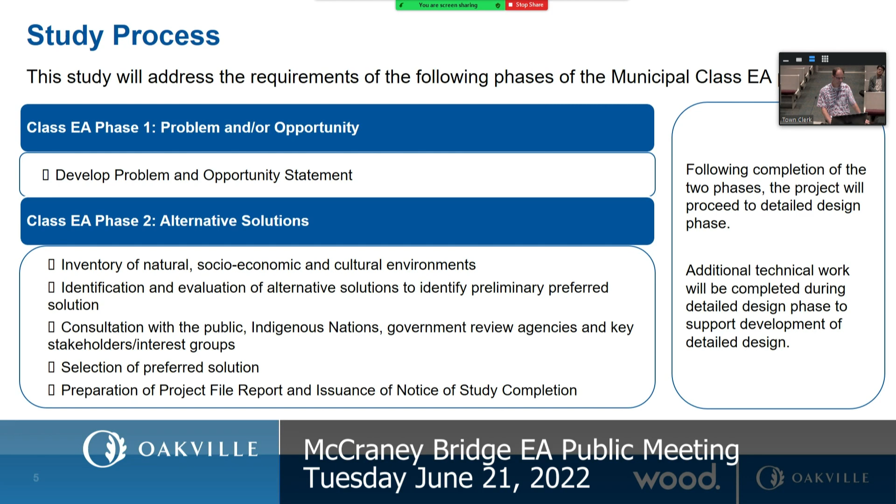So work completed to date for the McCraney Creek Bridge replacement under the Class EA for Lakeshore Road includes natural environmental assessments, fluvial geomorphology and channel design, Stage 1 archaeological assessment, cultural heritage report, and stormwater management. In addition, there was public consultation that was held, so there were 3 PICs, stakeholder meetings, and on-site resident meetings.

So all of these, of course, were completed for the broader study, the broader Lakeshore study. However, they did include components for the McCraney Creek structure. Similarly, for agency consultation, meetings were held with Conservation Halton in 2017 and 2018. These also included a review of alternatives for McCraney Creek. And we consulted with Indigenous nations. So we circulated notifications. We met with the Mississaugas of the Credit First Nation.

There are additional technical investigations that were completed, notably the flood mitigation opportunities study for 14 Mile Creek and McCraney Creek systems, Town of Oakville's creek inventory and assessment studies, and structure inspection, which was done independently of this study as recently as 2021.

So a little bit more information here. On the top right, you can see the key plan, which locates the McCraney Creek Bridge on Lakeshore Road, just east of 4th Line and west of Whittington Place. The bridge structure carries McCraney Creek, which flows into Lake Ontario, south from Lakeshore Road West. It accommodates 2 lanes of traffic, obviously eastbound and westbound.

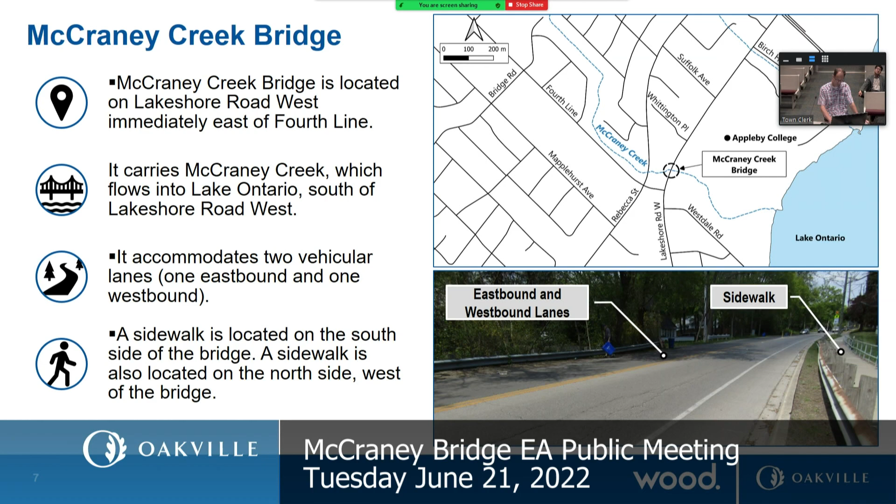So with respect to the McCraney Creek Bridge structure itself, it's a concrete arch structure built over 80 years ago in 1940. It was subsequently extended with a box culvert section. So you see the original arch on the left, the box culvert extension on the right. Width of the culvert structure is 5.4 meters. So those 2 photographs just show the conditions on the north side and the south side.

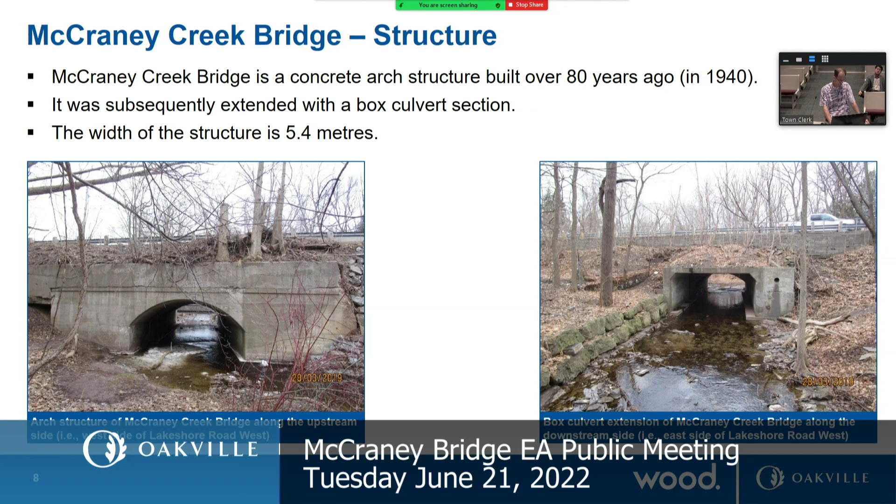Okay, so there was emergency repair works completed as well in 2017. In 2017, the northwest supporting wall of the bridge collapsed as a result of severe erosion, an ongoing problem. So emergency repair works were completed to temporarily stabilize the slope. The collapsed wing wall, along with armor stone, were used as temporary support for the slope. So some figures there show both the pre-existing conditions with the failure as well as some of the emergency repairs that were completed.

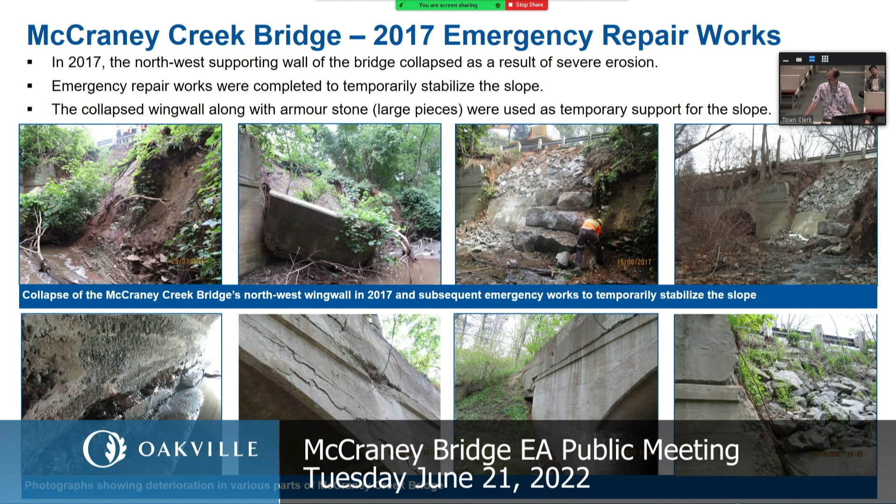So with that, I'd like to hand it over to Mir Telpur to take the next 10 slides or so, and then I'll come back to wrap it up. Thanks, David.

Good evening, everyone. I will now be going through two sections of this presentation. One section being looking at the existing conditions at the site of this McCraney Creek Bridge, and I'll also be going over the alternative solutions that we have identified and evaluated.

When the creek originates in its headwaters, it takes a form of natural channels and swales, but when it works its way downstream, it goes through urban areas where there is severe alteration to the creek, and it gets contributions from stormwater sewers.

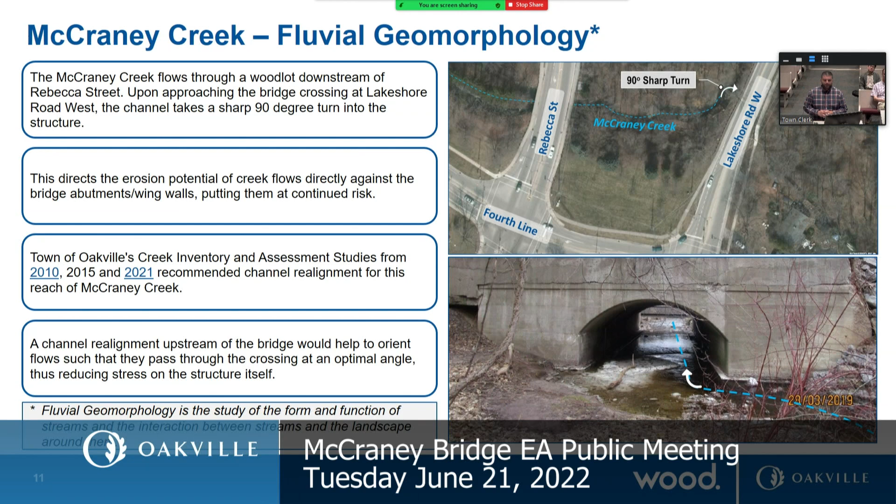So there are certain enhancement opportunities there in order to improve both the fish passage as well as the fish habitat. That would include naturalizing the creek bed under the crossing to improve the fish passage, incorporating natural channel design to improve bank stability and create flow morphology and diversity, incorporating vegetation into the channel edges and banks, and also enhancing the riparian vegetation. So the creek realignment is not only beneficial from a geomorphological perspective, but it's also connected with fish and fish habitat, and it also helps enhance that environment.

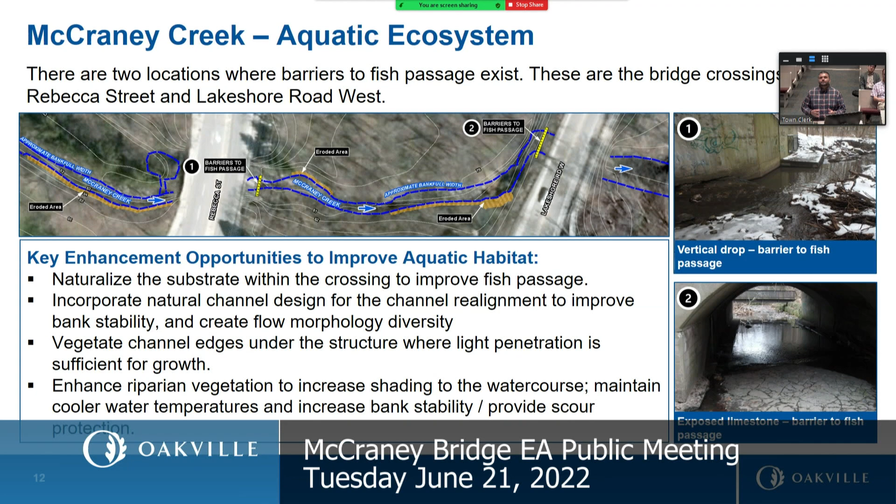So now we will look at the terrestrial ecosystem. Terrestrial means anything land related. McCraney Creek, downstream of Rebecca Street, flows through a woodlot, and that woodlot is primarily dominated by invasive Norway maple, with some native species such as black walnut and willow species. Our investigations also identified that the vegetation and the trees are disturbed, and there are signs of flooding causing erosion to the roots of the trees and vegetation.

Our investigations also identified that there are some trees in this woodlot that may provide suitable maternity roost sites for some of the species at risk bats. There are some opportunities to enhance the terrestrial environment, for example, planting native vegetation as well as native trees to improve the terrestrial habitat in this area.

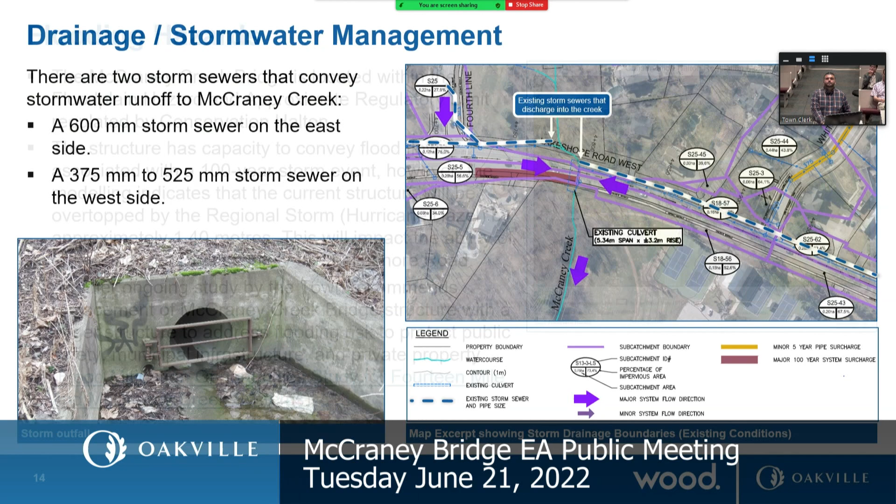The photograph on the bottom left of the screen is an example of the storm outfall, located on the west bank of the creek, west of the Lakeshore Road West. In terms of flooding hazards, the McCraney Creek Bridge is located within an area categorized by Conservation Halton as a floodplain hazard and approximate regulatory limit. Those areas are regulated by Conservation Halton.

The modeling completed for this crossing indicates that the crossing can convey flood flows associated with a 100-year storm event. However, if there was an event categorized as a regional storm, or Hurricane Hazel, there would be overtopping across Lakeshore Road of about 1.40 meters. That could impact the ability of emergency vehicles to safely use Lakeshore Road in emergency scenarios.

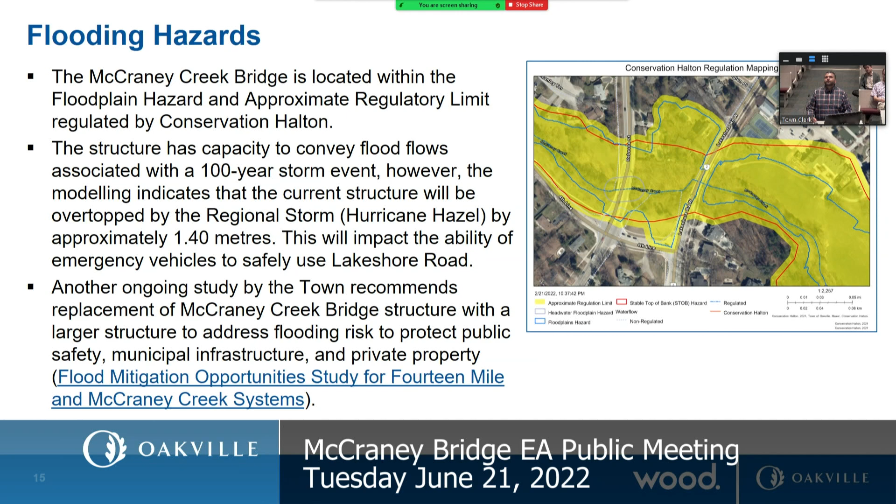The town is undertaking flood mitigation opportunity studies for the 14-mile creek and McCraney Creek systems. That study is recommending a wider structure at this location in order to address the risk of flooding for upstream properties and infrastructure.

In addition, the Town of Oakville, like other municipalities in Ontario, has a heritage register which identifies properties that have cultural heritage value or interest. The register is managed by the town. It includes various properties as well as bridges. McCraney Creek Bridge is not listed as one of those properties, indicating that it does not have potential for cultural heritage value or interest.

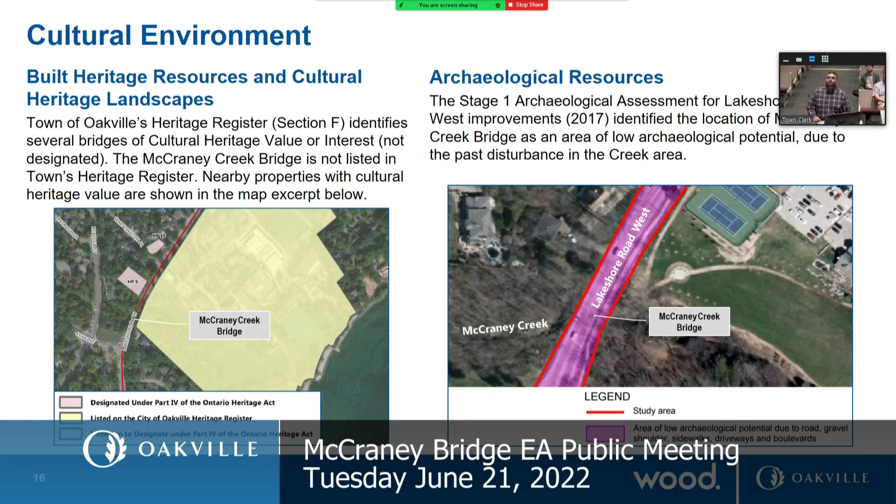In terms of archaeological resources, previous studies indicate that there is low archaeological potential due to past disturbance in this area. So through this information on existing conditions, we have identified the constraints, opportunities, and challenges that exist, and what processes are impacting the bridge.

So we have identified 3 problem areas that we could address with this environmental assessment study. One being the structural deficiency. As we explained with the photographs in previous slides, the structure underwent some emergency repairs back in 2017. Those repairs could be considered a bandage; they are just temporary in nature. A more long-term solution is required for the bridge structure itself.

The second problem area is a continuous erosion hazard on the bridge structure and on the roadway due to the alignment of the creek, which could be addressed via a creek realignment, as recommended through past studies. And the third problem area is flood hazard; as we explained, there is a risk of flooding due to the sizing of the bridge structure, and a wider, larger structure could help address that.

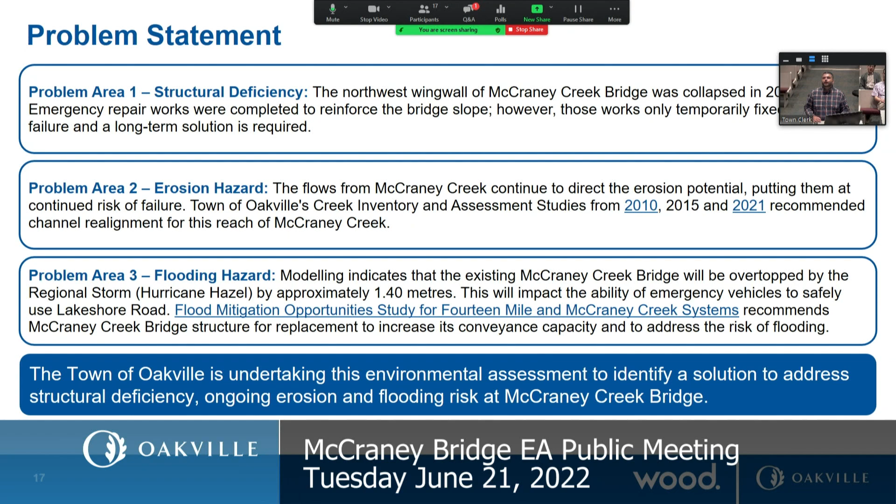So in support of our problem and opportunity statement, the Town of Oakville is undertaking this environmental assessment to identify a solution to address the structural deficiency, ongoing erosion, and flood risk at this bridge location. Now, we thought about how we can address these problem areas. We could leave it as is, do nothing. We could replace the bridge and leave the creek alignment as is.

The third option being we could replace the bridge and also realign the creek. And the fourth option being we could replace the bridge, realign the creek, and also orient the new structure so that it aligns well with the realigned creek. So we took those options and evaluated them. Again, this work was completed as part of the Lakeshore Road study, reviewed and updated as part of the current ongoing study, and shared with Conservation Halton for review and comment.

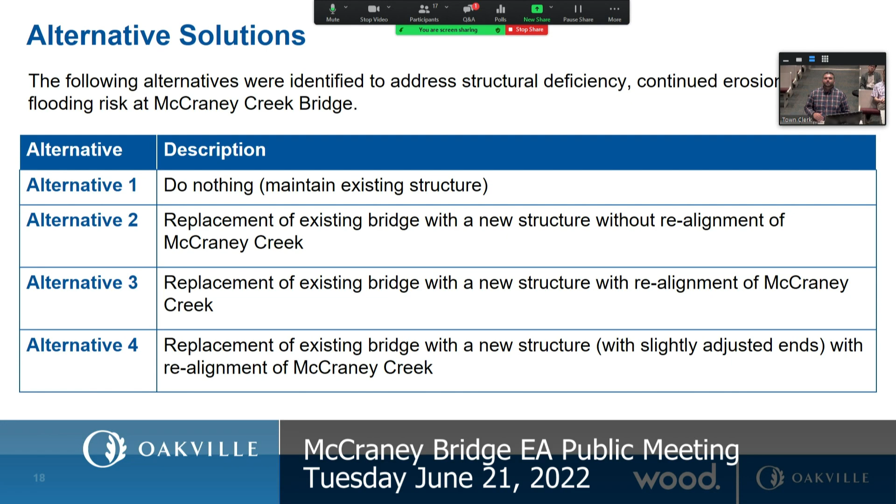If we were to leave the bridge as is, the do nothing scenario, it will continue to pose a flooding risk. The erosion problem will remain unaddressed, and the erosion could significantly damage the bridge structure, which could also pose a risk to public health and safety. The bridge replacement option with no realignment of the creek could address the flooding problem, but it will not address the ongoing erosion risk on the bridge structure and the embankments. So those 2 options got screened out.

We were left with 2 options: bridge replacement with creek realignment, and bridge replacement with creek realignment while slightly adjusting the bridge structure to align well with the creek realignment. Out of those, our evaluation indicated that option 4 is the recommended solution because it will address the erosion issue, it will address the flooding issue, it will align well with the new realigned creek, and it would avoid further erosion risk on this structure.

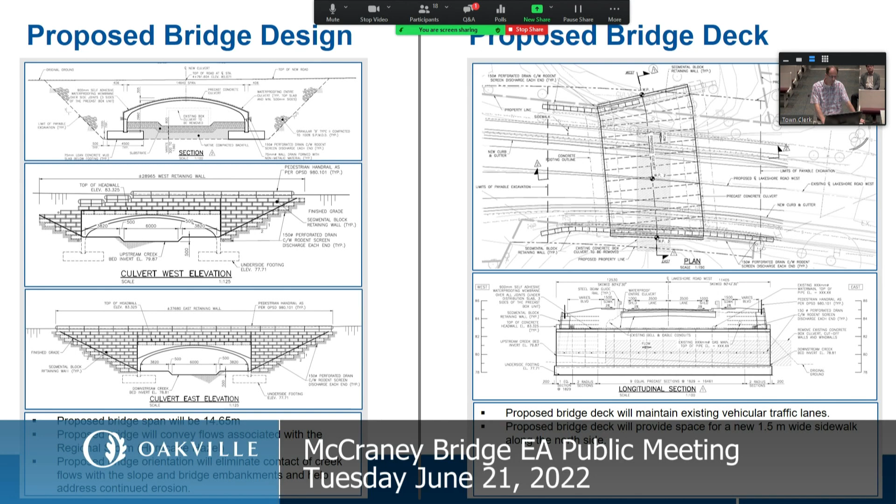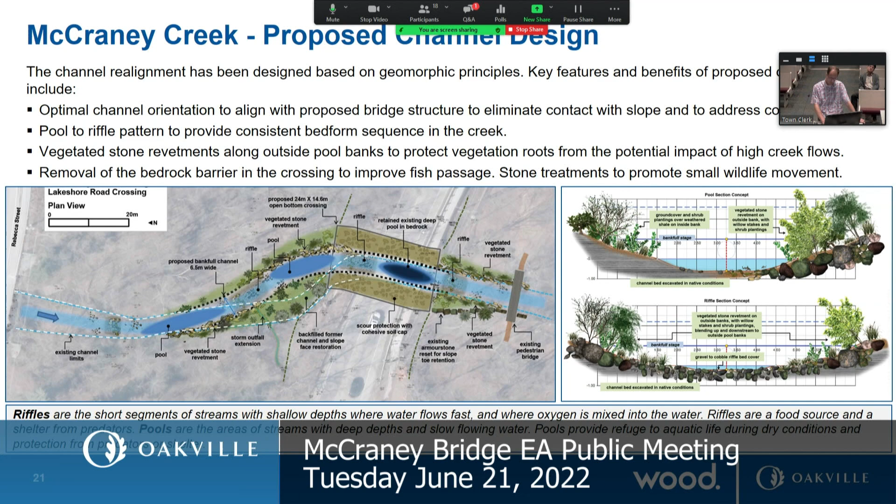A pool to riffle pattern to provide consistent bed form sequence in the creek. Vegetated stone revetments along outside pool banks to protect vegetation roots from potential impacts of high creek flows. Removal of the bedrock barrier in the crossing, which Mir mentioned, to improve fish passage. So stone treatments would promote wildlife movement. You can see from the figure shown here that there's extensive plantings associated with that to stabilize the watercourse over the long term.

So in addition, the project has considered climate change considerations. Oakville's climate change primer provides information to residents on climate change and how to protect human health and natural environment, residential homes and properties against the impacts of changing climate. For building resiliency, the document refers to the town's climate change strategy. There are a number of aspects of this project that will advance the town's adaptation actions related to the following impacts of climate change.

So the first is the objective for creeks and channels to meet or exceed existing capacity during extreme precipitation events. So that's certainly been a design component of this project. Extreme weather will still result in increased natural debris, fallen trees, sediment, and branches entering creeks and channels. So this design would be resilient against those sorts of possibilities. Warmer, shallower water will threaten sensitive aquatic species and habitats. So the design of the watercourse maximizes the low flow channels to the degree possible to provide presence of water in the low flow conditions.